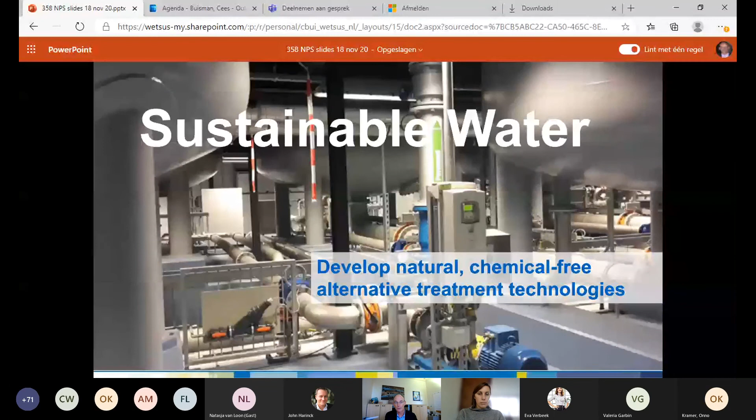I'll give you some examples of things we are working on now and will be working on for the coming years. For every field, I want to give you a few examples. In the first place, this biological activated filter was developed as a cleaning technology for membrane treatment.

Here you see the factory that is built for Shell to produce clean water for their operation in the eastern part of the Netherlands for enhanced oil recovery. They developed this activated carbon technology, and they clean it every so many times with pure oxygen.

They have already been running for 10 years, and they found out it removes all kinds of medicine residue which are in the sewer water that is treated here. Without adding any chemicals - I consider oxygen as a natural chemical - it is clear it's not adsorption by the carbon. It must be that these chemicals are really destroyed by the oxygen and the bacteria.

So this is one of these examples, but it's actually a little bit too expensive to use this at all wastewater treatments of the Netherlands. So the research is now on to see how we can optimize this technology so that it becomes more available.

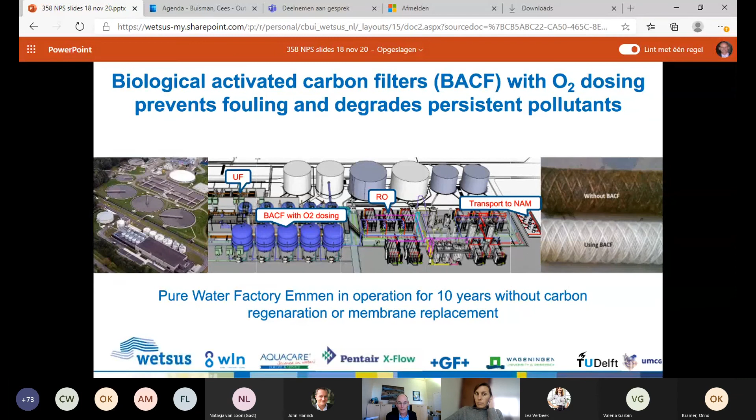Another example is green polymers. As you may have read in the newspapers, this granulite that has been discharged in the Dutch sand holes leads to very much public uprising, because this granulite has been dewatered using non-natural chemicals, and the effect of these chemicals is very suspicious, although of course the official government says it's not suspicious. If you look in the literature, you can see it is an unwanted chemical in nature.

But the dredging companies are doing this everywhere in the Netherlands - where they dredge, they have to dewater, and these chemicals are used and then released in nature again. So it would be fantastic if you would have bio-based, biodegradable polymers that you could use to dewater it, then discharge it in these holes, and the chemicals would slowly but certainly disappear and have no effect at all.

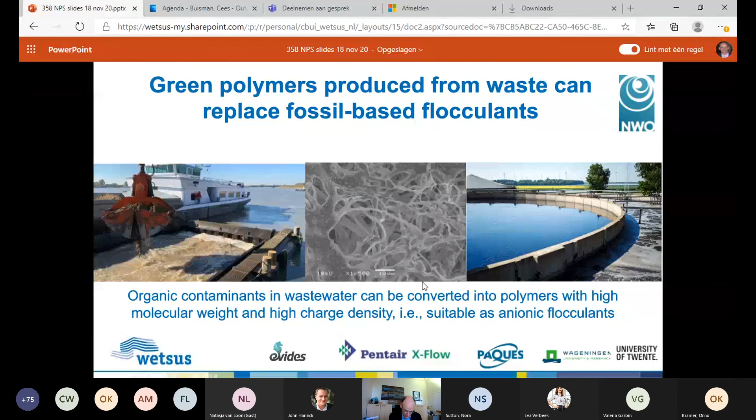So this is what we mean with chemical-free, natural chemical-free approaches. Now, the last one is membranes. Membranes, of course, are in principle chemical-free, but in many cases, many chemicals are used to run these membranes.

So wouldn't it be very nice if we would have - now my house telephone is ringing.

Wouldn't it be nice if we have membranes that we can run chemical-free? Here you see the electrodialysis membranes that have been developed thanks to the Blue Energy project we are running. So it's a new approach to membrane technology.

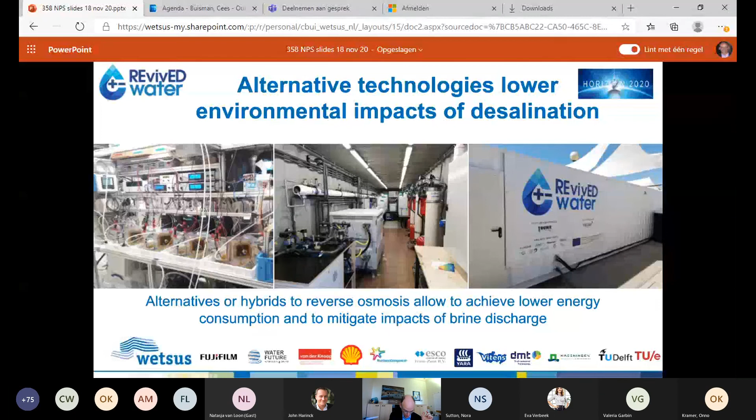The second topic is healthy environment. What we mean here is to use all kinds of modern sensors, but also self-learning data programs, artificial intelligence, so that we can predict more in real time if things are going wrong or not. This is for things happening for our health, like drinking water, but also for discharges, so it's for protecting the environment.

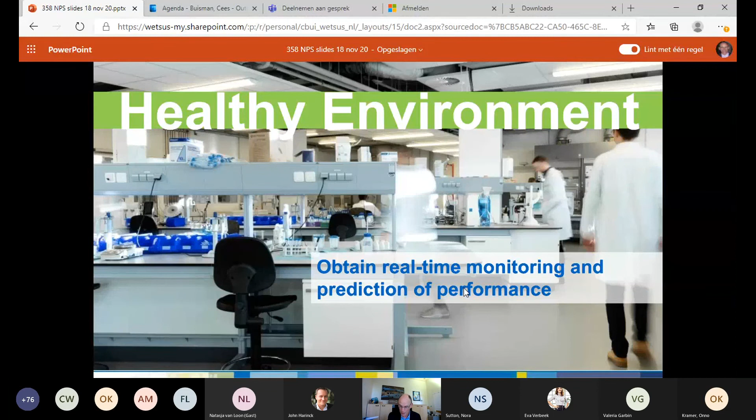One example is our technology that uses ultrasound waves to predict if pipes are going to break. When a pipe breaks, everybody knows it, because then you probably have a water fountain. But the trick, of course, is to know when pipes are going to break, so when do you need to replace them?

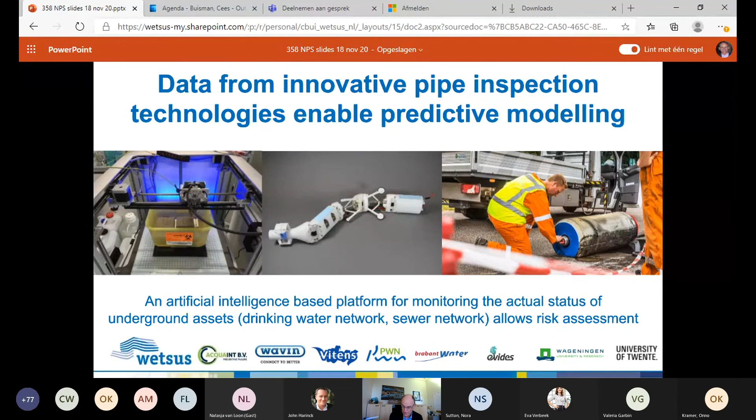Normally drinking water companies replace large sections all at the same time because they don't know better. If you could predict when you need to replace drinking water pipes, you could save billions in the Netherlands alone on these replacements, because they are very expensive. So we're going to build an artificial intelligence-based platform monitoring the actual status of these pipes, combined with modern ultrasound sensors.

The second one is working with light, photonics. In this case, we bring this light-guiding glass fiber into the soil, and then we can measure in real time the groundwater flow, which is kind of impossible at this moment. With all the pollution we have in the ground these days, it's very important to know how the groundwater flows, so you can direct the clean groundwater around the pollution and don't have to clean it.

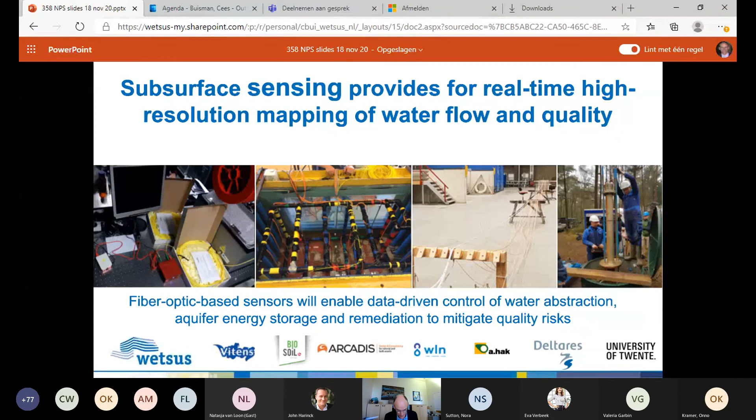Remember, in the Netherlands more than 50% of the drinking water is still coming from the ground. So this is very important for drinking water companies.

Finally, this is based on new technology with genomics. It's becoming so cheap now to look at, for instance, bacteria in drinking water, but we can also do this for wastewater. We can combine the data from genomics with the physical and chemical data that are easy to measure, and then integrate all this data into an integration system with machine learning.

We hope we can develop real-time virtual sensors that, for instance, can easily say if drinking water is safe or not. At this moment, in many cases, we only know two or three days after the fact if there was something wrong with the drinking water. It would, of course, be fantastic if we could know that already before we drink it.

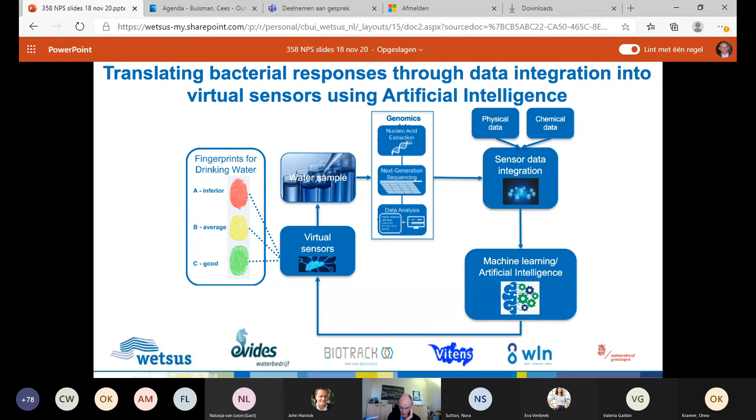So this is all based on these modern technologies.

The next one is more in the field I'm also working on at Wetsus, at Wageningen. As you know, the circular economy—taking the zinc from your roof and recycling it—that is easy. But in the water system, zinc is leaking away, along with other things like phosphates and nitrogen, because it's low concentrated, diluted, and to recover that is a little bit more difficult.

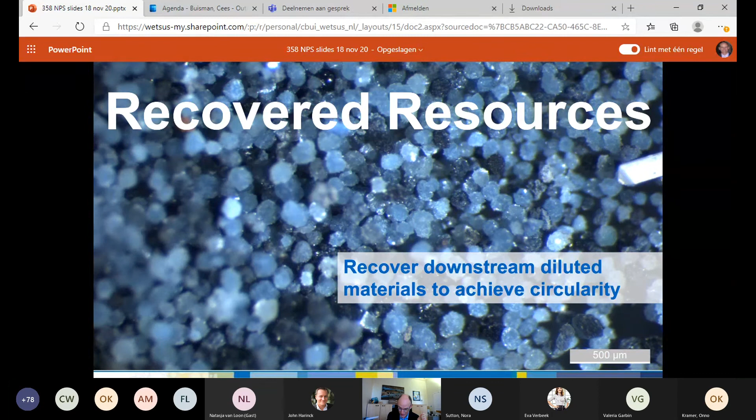So that's what we want to focus on. Now we have a whole field of polymer recovery, and PHA is of course the most well known. This research started in Delft, and at Wetsus we now have all the old technology from Veolia, a big water company that stopped with this, and their research manager is now also part of Wetsus.

Now we can bring all the knowledge we have in Europe together and try to speed up this technology. It was just announced that the first large pilot plant is going to be built at HVC in the western part of the Netherlands. Then, for the first time, we will produce enough waste-produced PHA material to do all kinds of tests with it.

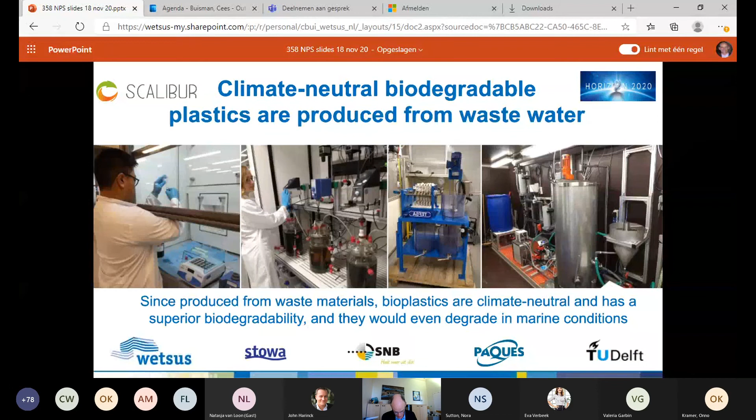Another one is ammonium recovery. It's very difficult to recover this in an energy-positive way. At Wetsus we have developed a technology that uses electrochemistry, where the hydrogen produced at the cathode is fed back to the anode. In that way it becomes an almost energy-neutral system that can be scaled up and recover ammonium at a very fast rate.

Then you get this ammonium, which can be recovered as ammonium nitrate or ammonium sulfate. This is a way that we hope means we don't have to destroy the ammonium anymore like we do with denitrification and anammox processes. Instead we can really recover it and save the production of ammonium at the same time. This is an electrochemistry development.

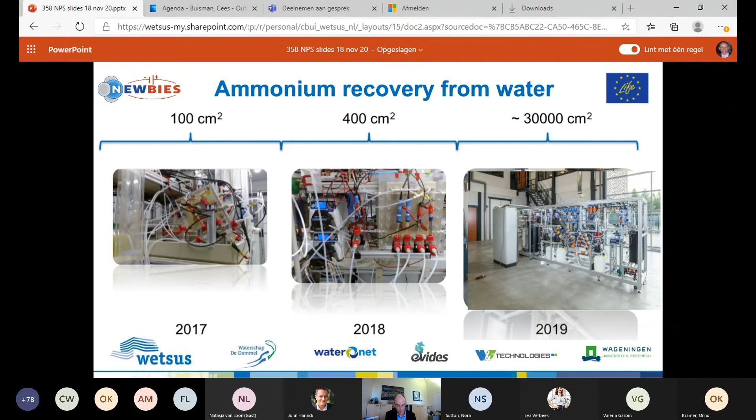And another one, a precipitation technology, recovers the phosphate that is in wastewater as iron phosphate.

The bacteria can convert iron phosphate into magnetic iron phosphate, called vivianite. With just an industrial magnet, it becomes very easy to recover this vivianite from the sludges of wastewater plants. We've built a pilot plant, and we can show that more than 90% of the phosphates in wastewater can be recovered this way, with virtually no real adjustments to the existing wastewater treatment plant. We believe this could be a very powerful technology to solve the phosphate recovery problem.

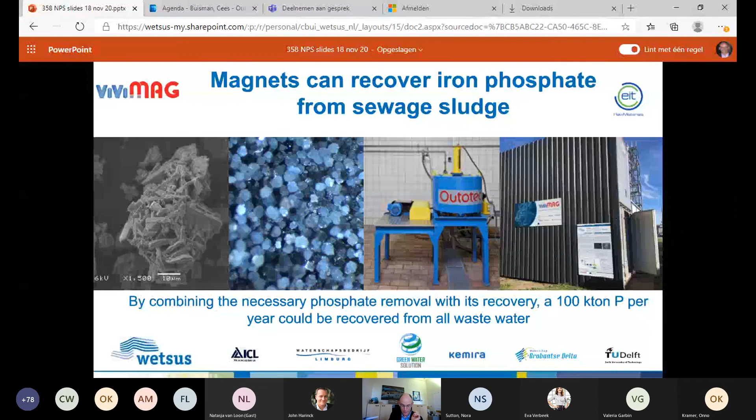I want to stress these are just a few examples from our program, because we have more than 50 projects, so covering them all would be too long.

Finally, our new team is Drought Resilience. What you see in the world is about 2 billion hectares of degraded land, where the equilibrium with water has been broken, and deserts remain that were not deserts in the past.

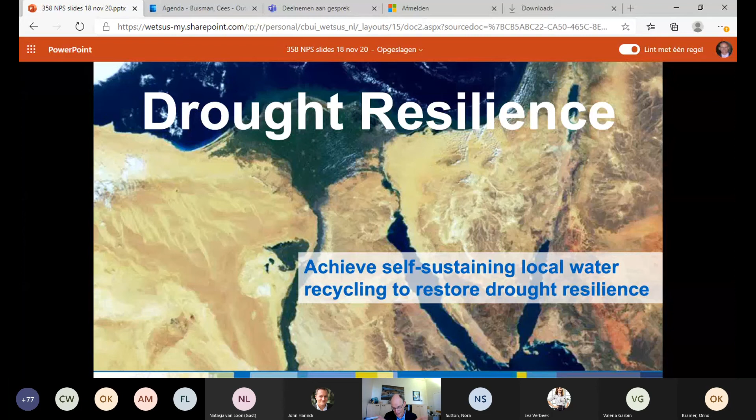To show how incredibly powerful this can be, here's the example of the Loess Plateau in China. The Chinese decided in 1995 to regreen this area, which is as big as France, and is the original ground where Chinese culture comes from. It had been destroyed by over-exploitation, and in an incredibly short time it became completely green again.

You now have little streams of water again, and the soil is no longer flushing away. But this is an area where there was enough rain. So if they make plateaus and get the plants growing, the rain could be absorbed by the ground again. This is a special case of what you can do in areas where there is enough rain.

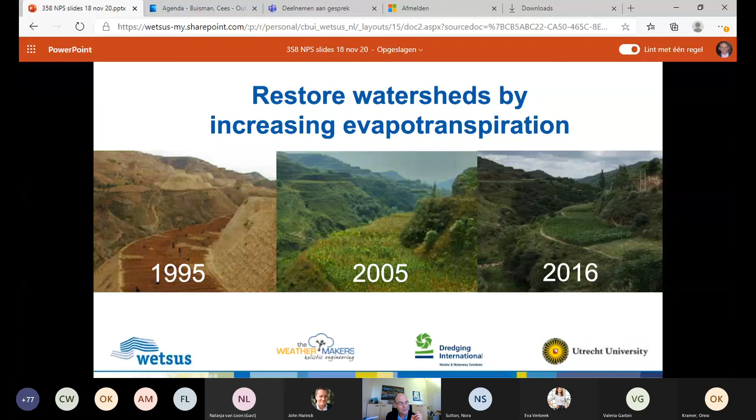But the concentration you can achieve at the sea is not enough for condensation, because the land is so hot and dry that the air increases in temperature, so the condensation point moves further away. Since there's nothing to evaporate water, the concentration of water in the air doesn't increase either. Normally there's a range of mountains around these deserts. As the hot wind with water goes up, the temperature goes down, and that's where you'd have the biggest chance of condensation. But that doesn't happen because there's not enough water in the air.

So if you had a forest in these places, the forest would increase the amount of moisture in the air. Then, as the wind goes up against the mountain, you would get rain. But there's no forest anymore in the Sinai. So could we, with technology, develop a new kind of evaporation system that creates the same amount of moisture as a forest? Then nature would take care of the condensation.

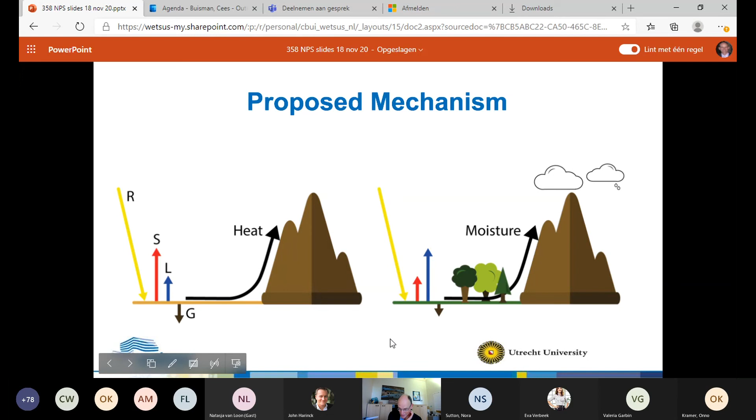The last example is that you can bring more organics into the soil so that it becomes more like a sponge. This is becoming important in the Netherlands, because once it gets dry, it becomes drier and drier. If you had a lot of water stored in the soil's organic matter, you'd have a new evaporation source that could help produce rain again. One thing we're doing for that: in the Netherlands we currently export our manure because there's too much phosphate. We have a project to recover the phosphate from the manure, and also the nitrogen. Then the manure can stay in the Netherlands, increasing soil organic matter, while the nutrients that are a problem here can be brought to areas where there aren't enough nutrients. That's the last example I wanted to give.

I hope with these 12 examples and 4 areas I've given you an idea of where we believe the water technology field will be going in the next 10 years. Thank you very much for your attention.

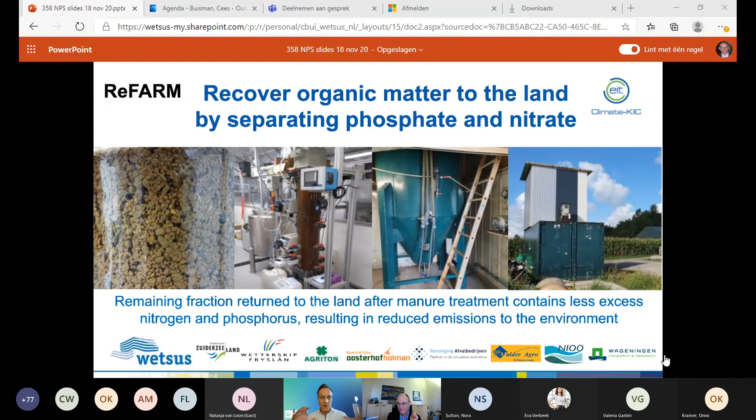This was my first presentation ever for a webinar. I think a very good one. Thank you, Cees. Very interesting presentation, and a nice overview of all the activities at Wetsus and Wageningen University.

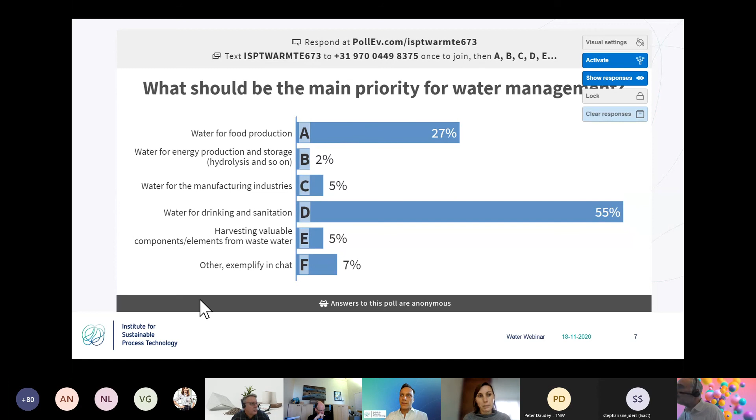Yes, please. So I think it's very important that if you use the water and then discharge it again—in other words, it's still water and goes back into the river—you can use it again.

Thanks for the introduction. I have a picture of a beer glass in one of my slides, but I think none of us can really enjoy it. So just to tell you a little bit more about what I'm doing: I'm an associate professor, but I'm also an entrepreneur. I started a company, and I'll tell you in a slide or two what the company is about. Why bubbles are important is that what I'll share with you in a few minutes is a very fast progression from technology readiness level 0 up to 9.

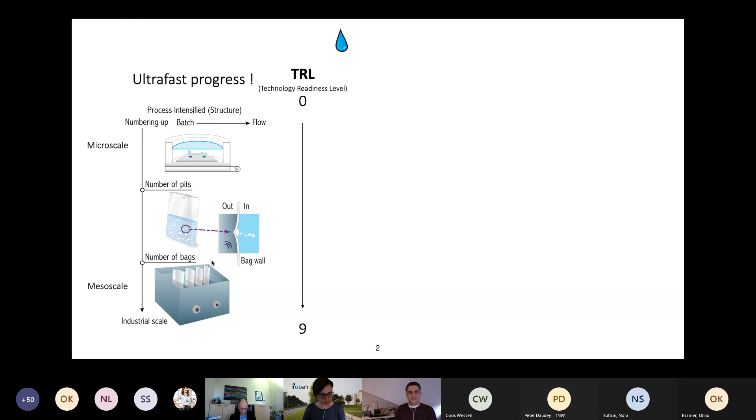I don't know how many of you are familiar with ultrasonic bath, ultrasonic technology. I'll tell you more in the following slides, but most people are familiar with small size applications. Actually, I'm looking into scaling up these ideas into something even bigger - this is an industrial ultrasonic bath, there's a truck here and a technician here. So all that I'll tell you, even though it started as a micro-reactor technology concept and is now some sort of mesoscale reactor system, has the potential to contribute to water remediation.

For that, I'm collaborating with a water utility company in the west of the Netherlands, and KWR, the Water Research Institute, and other partners.

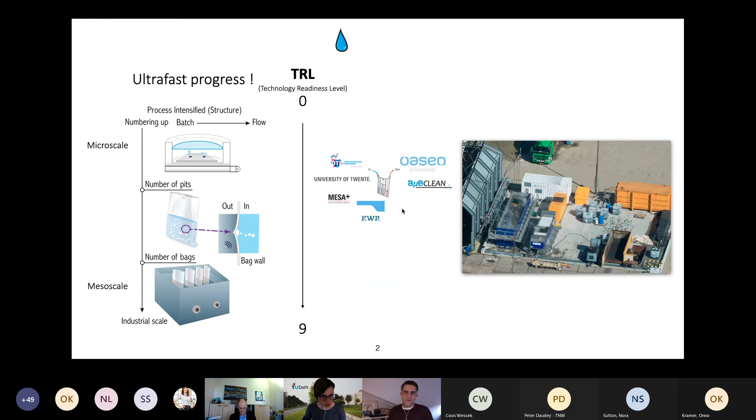As I promised, I have some beer here. I don't know how many micropollutants are in it - I drank it in Switzerland a few years ago. But if you've done this experiment, or at least put some carbonated water, you might know that typically you have these bubbles rising up from the bottom, because there's usually a crack at the bottom or some impurity that allows gas bubbles to remain there. As the saturation level of the liquid with the given gas, in this case CO2, is quite high, the bubble can grow, detach, and a new bubble is formed.

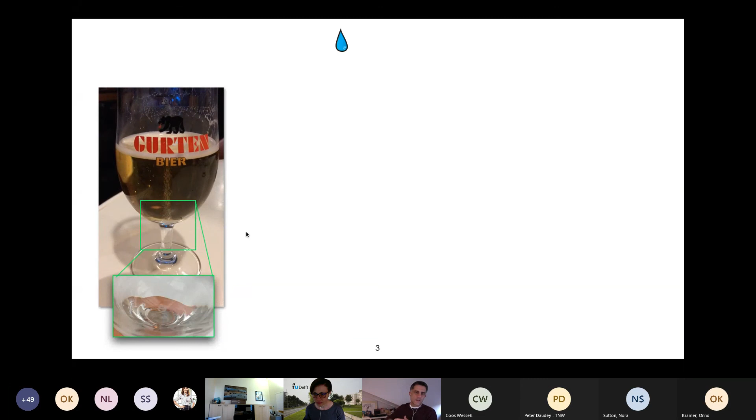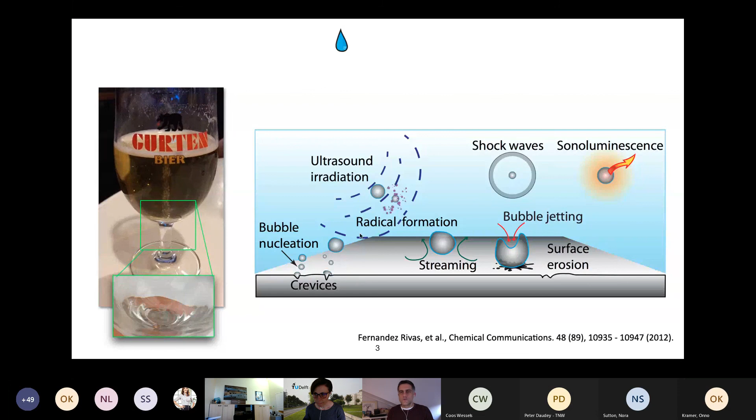If you keep doing that for a long time, you can get interesting effects, like getting drunk if you drink too much. But what I want to tell you goes more into sonochemistry, and why this is important is because for many years, at least 60 years, people have been looking at the effects of ultrasound, principally at radical formation, because you can break molecules inside the bubble since the pressures and temperatures are very high when you compress the contents of this bubble - to the point that you can actually get plasma formation and light emission from the bubble.

You also have interesting phenomena like shock waves, streaming, and jetting, and I'll show you a few of these. But what I decided to focus on is where our bubbles are created, because I thought that if we want to improve the efficiency of these sonochemical reactors, which are notoriously known for very low efficiencies in the order of 10 to the power of -6, let's give it a try there.

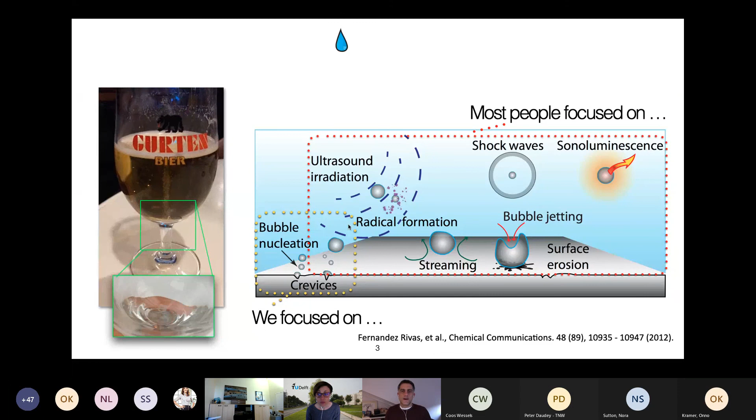That's why I always invite people to finish the drink. But why this is really interesting from a chemical or physical point of view is: let's assume you have a piezo material that is oscillating, in contact with a liquid volume. Then you might have a bubble that can grow and collapse repeatedly, and at a given moment you have all the conditions required for radical formation, sonoluminescence, etc. When you have a bubble in proximity to a wall, the surface is deformed and you get a liquid jet - this is why ultrasonic equipment is typically used for cleaning.

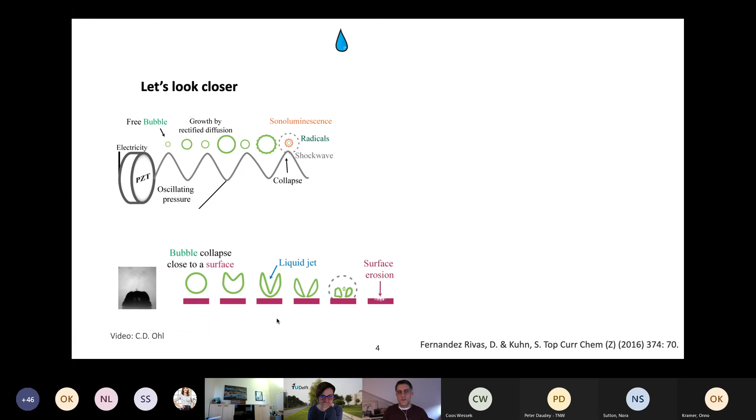This is an actual video of how a bubble jets towards a surface. These are very small bubbles, in the order of 300 micrometers in radius. But why this technology hasn't really picked up until now, even though it's very friendly towards the environment - because with only electricity you can create a lot of radicals. I only illustrate OH here for simplicity, but you can get a lot of interesting chemistry. The problem is that to really reach industrial scales, you need to control many aspects at different scales.

This is what I've been busy with in the last few years, and I'll give you a little bit of a flavor of how we ended up commercializing a product in less than 4 years.

So it all started with a small microreactor. This is a very small version of the beer glass that I just showed you earlier. We have a silicon substrate, and we perform some artificial modifications, so small cracks at the bottom of this substrate. Then we look from the microscope above what happens when you apply ultrasound there.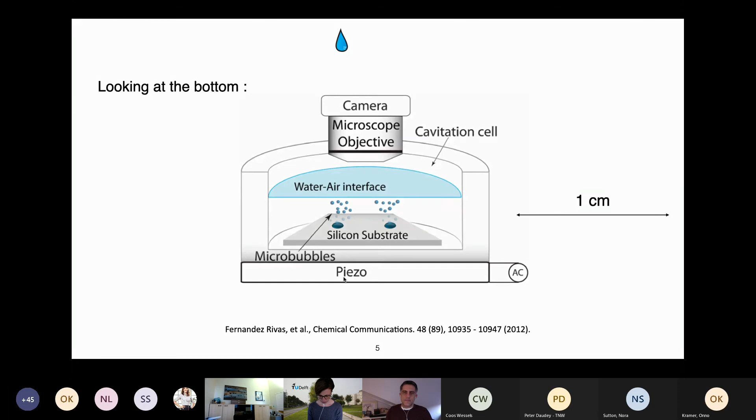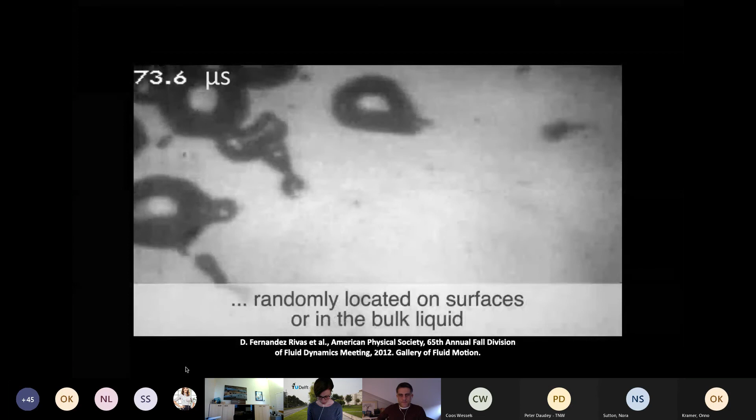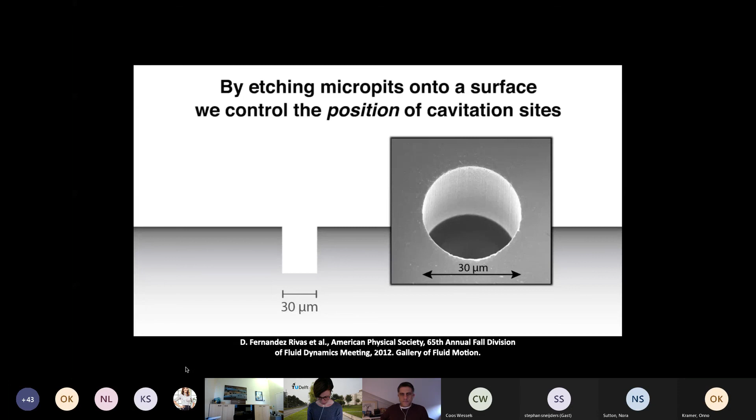There's a short video here that explains itself with some text, so I'll let it run a little bit. I hope you can all see and read it. The 30 micrometer dimension is indicative, it can be a bit larger. Also the frequency can be lower or higher.

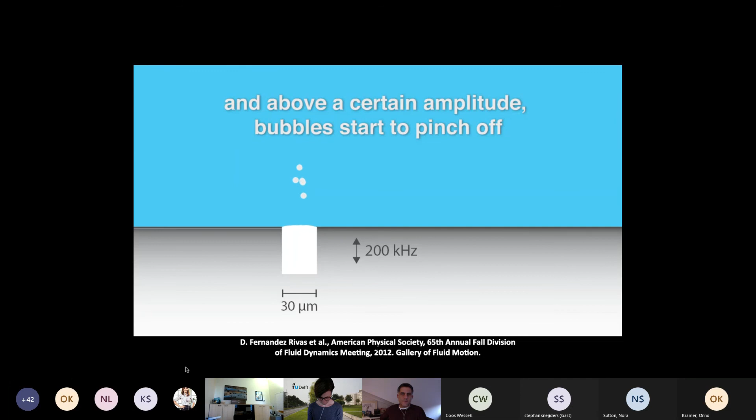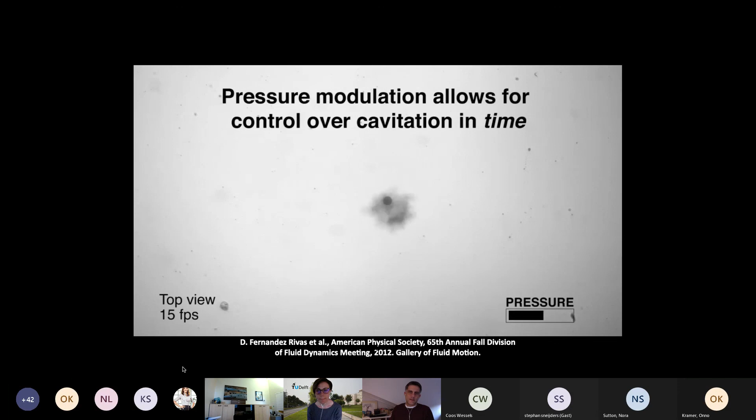We have access to quite fast cameras here in Twente, and you will see now what happens and why we say that we have tame or controlled cavitation. When you reduce the power or the electrical amplitude to the piezo, you can decide whether to have bubbles or not. If you look with a higher frame rate, in this case 10 million frames per second, you see that it's quite a violent situation there.

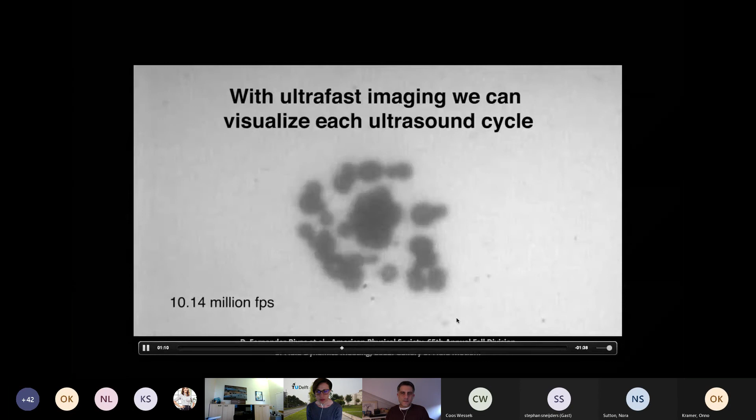What follows is a bit more of a physical description. These bubbles like to talk to each other. But the interesting thing is that due to this interaction of the bubbles with themselves and any surrounding boundary, you can use them to actually clean objects.

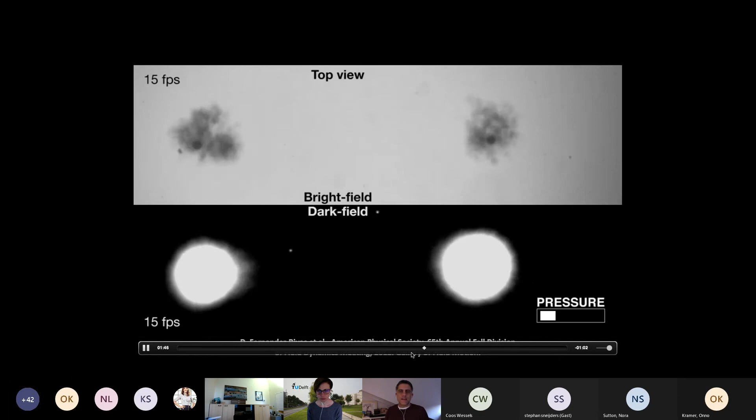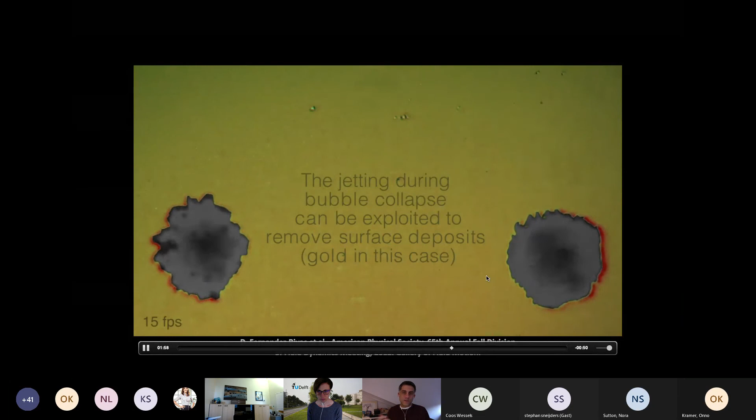Just to remind you, there's a millimeter from here to here. And if you put a surface with a contamination close enough, which could be biofilm caused by bacteria, or if you want to clean a membrane, you can use these bubbles to locally detach any contamination you might have there, like some cake. Then the typical question we get in microfluidics is, what happens when you number up?

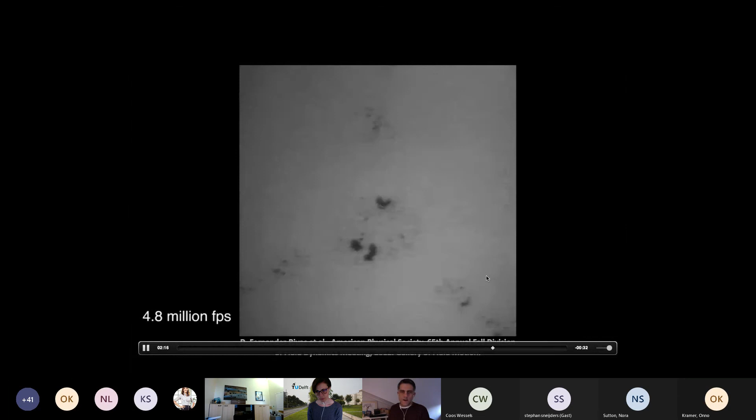I can show you what happens with 3. If you ask me what happens with 4, well, it's kind of logical to have a cross. But we kind of skip those steps, so from 3, we went to like 100 and even more. I'll show you very soon what happens.

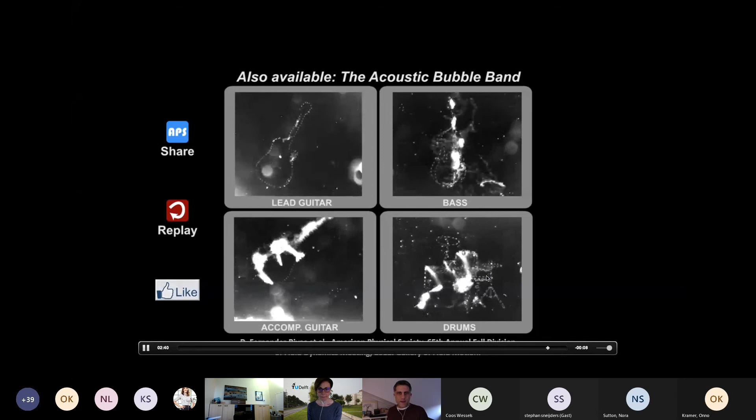If you follow Star Wars, I wanted to put Star Wars here, but some of my colleagues were not so tech-oriented, or let's say nerdy. We have a small prank here for those of you who like music, so we created the acoustic band, the bubble band. But well, it's ultrasound, we don't really know what they are playing.

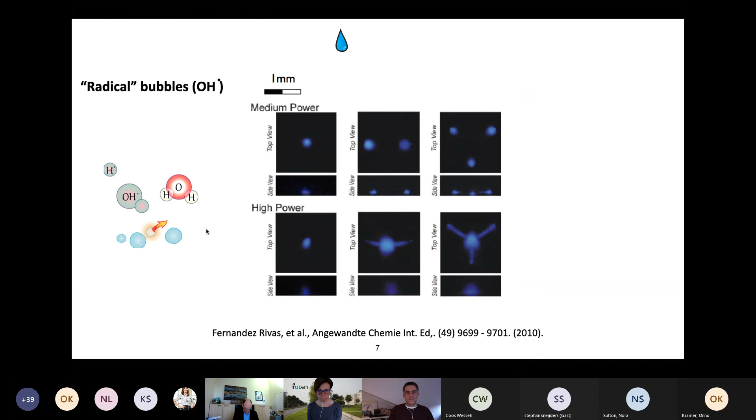But moving on to the most serious part: these bubbles are chemically active, as I mentioned earlier, they generate radicals. When you measure these radicals and calculate the efficiency of the reaction by multiplying the energy required to break the water molecule into OH and H radicals, by the production rate, and dividing by the electrical power, you get a feeling, or actually an obvious message.

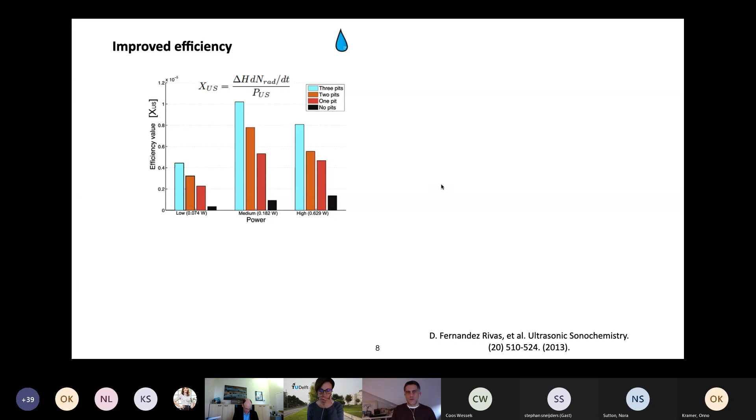When you have 1, 2, or 3 of these modifications, you get a boost in the efficiency. But of course, after a given value, you cannot really extract that much more efficiency, because some of that extra energy is not going to create more radicals, but is going to the formation of the bubbles, shockwave, and other phenomena like jetting that I introduced earlier.

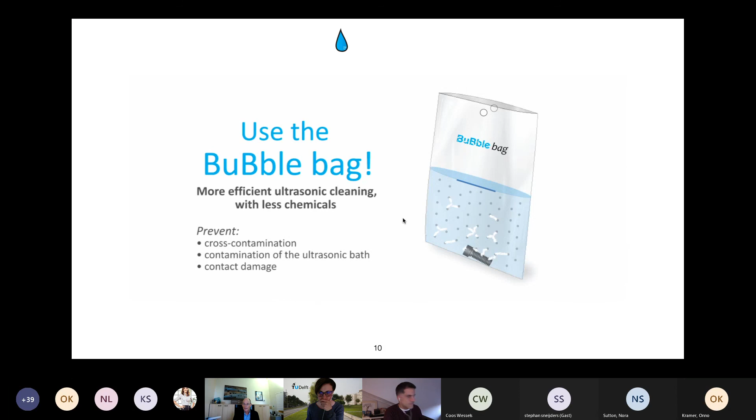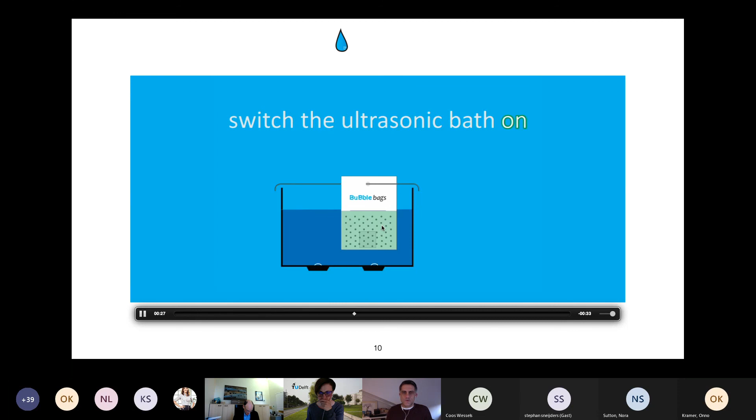So this is what I plan to show you here now. I'm not sure if you would be listening to a small tune, but the music is not that important. If you really check, these little dots are actually the plastic version of the silicon substrate that I showed earlier that we use to trap these bubbles.

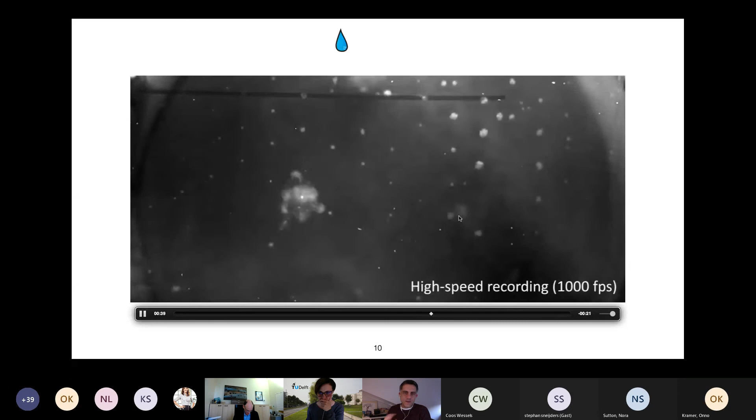Again, the music is not the best. Here you see an actual real-time movie, and then we zoom in and look at the high-speed recording. All these bubbles are chemically active.

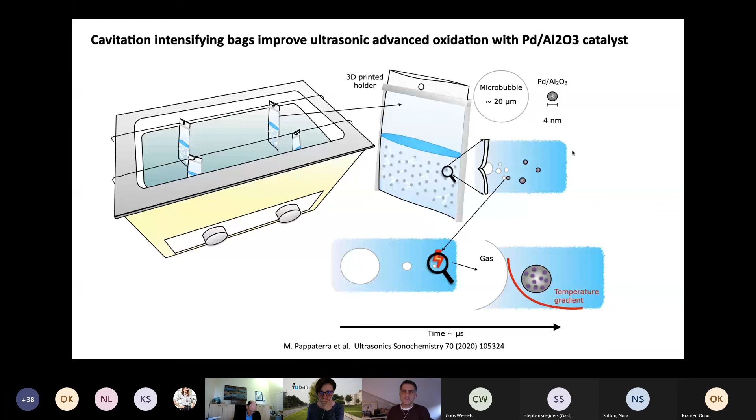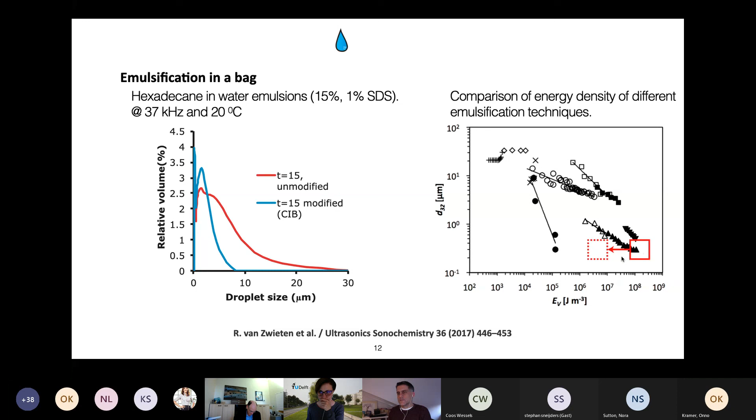Just earlier this year, we published one more study, because we have been doing more research on this new type of reactor to improve the advanced oxidation combining with some catalyst. We have also used it for emulsification, so we improve the desired factor, the diameter of the particles. We are still not performing that good in energy efficiency, but obviously that can be worked out.

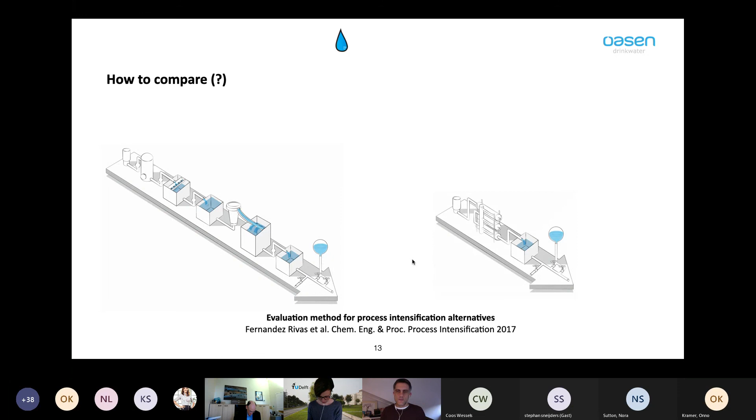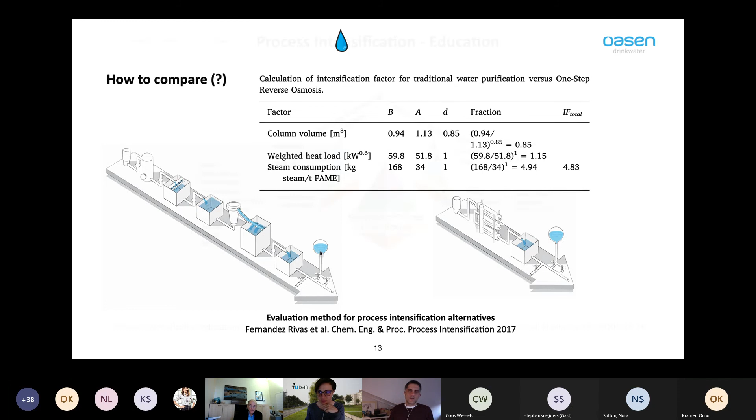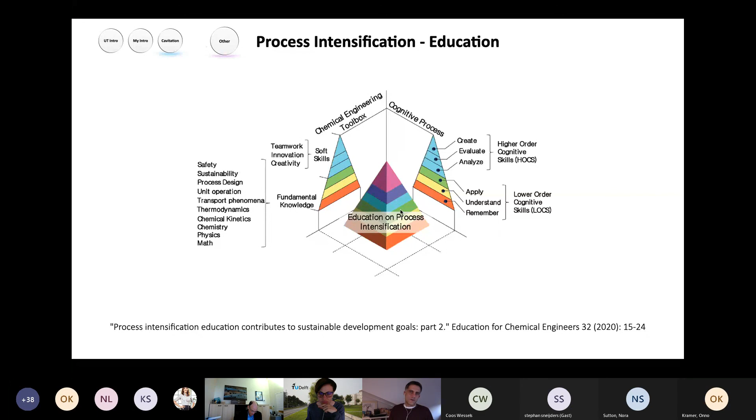Since Onno also mentioned something about education, I want to drop another small advertisement. We have recently written two big articles on process intensification and the challenges in educating the engineers of the future, and I think it might be relevant for the audience.

I've reached my 10 minutes. I would like to thank you all for listening, and if you have any questions, I'm more than happy to answer them.

Thank you, David. I was already familiar with the famous bubble bags, but it's always impressive to see the ultra high-speed videos, and I'll be interested to read the review in Education for Chemical Engineers. Do you have any follow-ups from the audience?

I can ask many questions because it's very close to my area of research, but I don't want to monopolize the conversation. Okay, then I'll just do it to warm up the floor.

So, it's a bit of a silly question, but do you scale it up with many bags or with bigger bags? Both should work. It all depends on how you design the acoustic field in the ultrasonic bath. There are a few approaches. You could directly glue piezos in the proximity of where you have these modified walls of your reactor, or you could think of a bigger ultrasonic bath where you have nodes and anti-node planes, and then strategically place these pits where you know you will have the maximum production of bubbles, with the rest typically dead already.